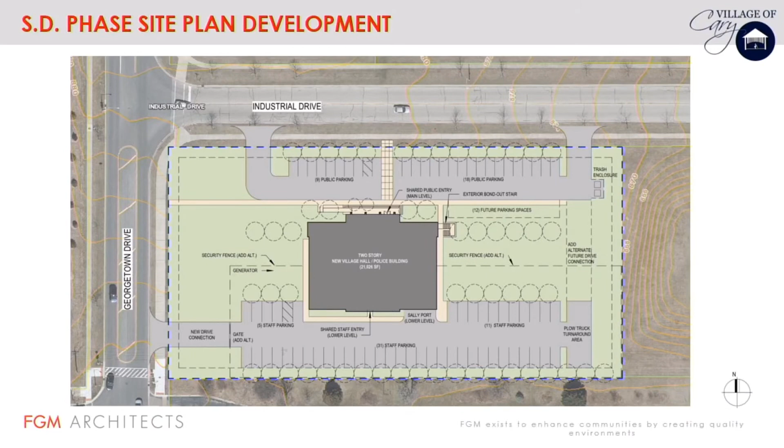And then the schematic design. Question before you go to the next one. Yes. This layout that you have right here, where there's only one way in and one way out for the police department area, is that how it's going to stay, or is that something that we can discuss as far as on the eastern portion, if there's a way out where they can actually go on Industrial Drive as well? We are still working, that's a good question, because we are still working at a staff level of just where the ingress and egress will be. So this is still fluid.

Right, thank you. And then the schematic level floor plans. This is the upper level, main level with the public entry off the north. Both floors stack very efficiently and economically right now, so they're both just under 11,000 square feet. In the bottom left, if you were at the open house as well, you saw we're starting to explore some of the different seating layouts for the council chambers.

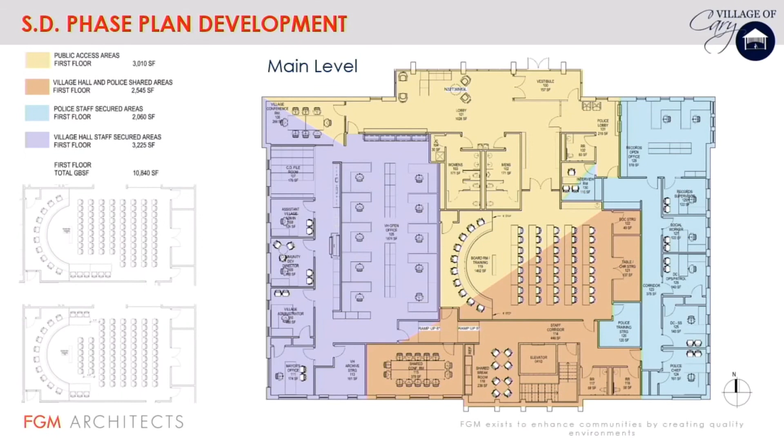The lower level, again, is embedded into the hillside, so the staff entry is on the south. Again, the color coding is primarily police. The orange is the shared spaces, and then the yellow is the limited public access at the northeast corner. And then just briefly, we started about 3 weeks ago with the exterior design process.

So we met with the key stakeholders a little over 2 weeks ago, and like we do with all design projects, we had a visioning session where we looked at regional municipal building examples around the area and took a poll to get great feedback on what materials and styles different stakeholders liked. Then we also looked closer right here in Cary, at your current building, other buildings, icons and signage.

And materials around town, primarily the new train station. There was a lot of great feedback over the last 2 weeks on the forms, the materials, the brick, and the ashlar pattern stone on the base. All of that good feedback led then into our massing studies.

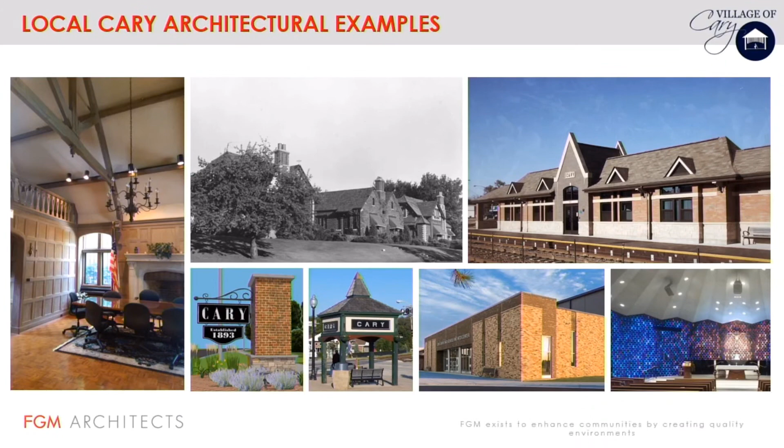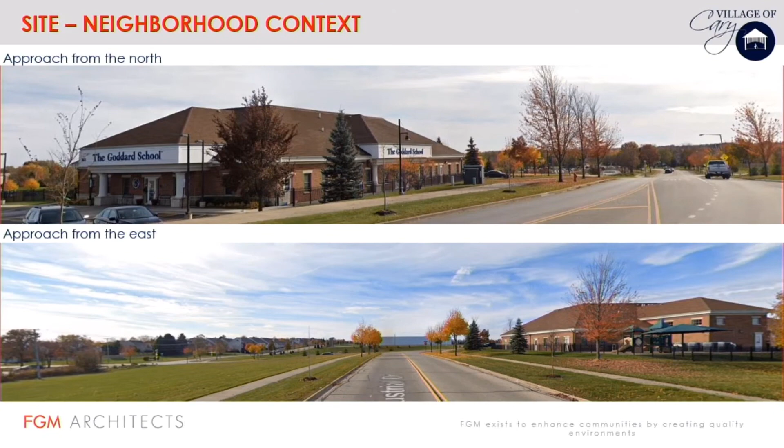2 weeks ago, we also presented some of these context photos, looking at the site, the hill, and the context of the Goddard School just to the north. It's important to understand the approach from all sides for the civic building. As you all know, with the park to the south, it is a building seen from all 4 sides, so it's very important to make sure it looks good from all of them.

How is the mechanical enclosure screened so it's not visible from the public? How does the council chambers get natural light from above? All of these are really going to be exciting to explore further.

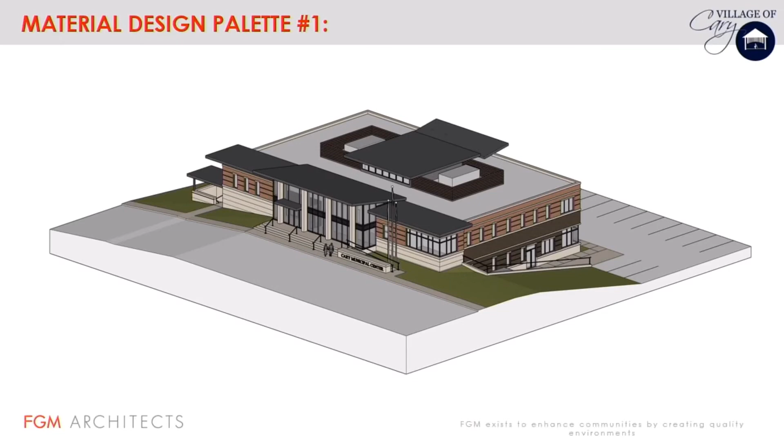But you can see from this bird's eye view, it's a very economical building with a parapet construction membrane roof, with very little areas that pop up. The council chambers, and then the front of the building, is where we're really putting the nice civic presence with the pop-up of the entry.

So the open house last week, we had 3 different material palettes. The first series of slides are the exact slides you saw at the open house, with the exact brick colors, the stone, all of those materials. And then with all the great feedback since last Thursday, we basically created kind of a hybrid variation.

We have 3 variations, and they all kind of stem from palette number 2, which was the perceived favorite. But before we get to the variations, I just wanted to go back through the original palettes from last Thursday. So palette 1 - again, the forms are all the same, it's really just the material differences.

Palette 1 had the red brick blend that's very similar to the train station on the front, and then it had more of a formal limestone-looking base water table. Again, the exact materials are yet to be determined in design development, but it had a bit more of that traditional, formal language, whether it was a cast-looking limestone.

In the back was introduced a little bit darker brick on the base, and that darker brick is similar to what was in the train station. And then the elevations, the four elevations for palette 1.

Palette 2 then had the same brick blend on top, the red brick, but the base was more of an ashlar stone, a bit more of that natural rustic stone similar to the train station. And a lot of these details, as you all know, are interchangeable.

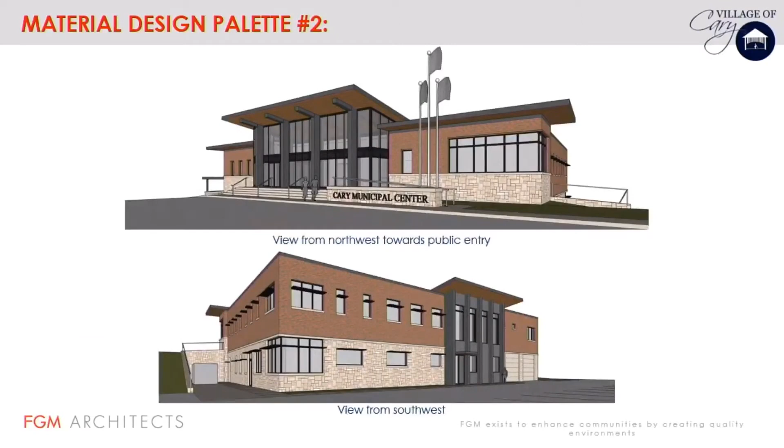And does everyone know when Brian's talking about the piers, the vertical elements? Just want to make sure we're all on the same page.

Yes, sorry, I can point to some of these - so the vertical piers, and the piers in the back. And then, you can barely see it at this angle, but in between the 4 bays, there's all sorts of options with whether it's metal panel, brick, or stone for those.

Finally, palette 3, which was presented at the open house. Same forms, but for this one we chose a different approach, almost an all brick scenario. Even though it was a darker brown brick like the train station, it was brick on top, and then brick with horizontal details and reveals on the bottom. Instead of the shed roof, we explored, just to have a third idea, these wood-looking portals.

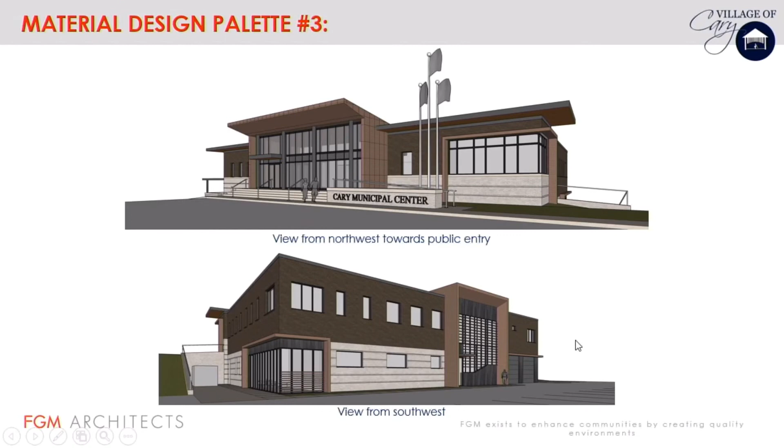So the staff entry, the public entry, and even some corners like this, the police break room and the shared village conference room, had these little portal shade elements.

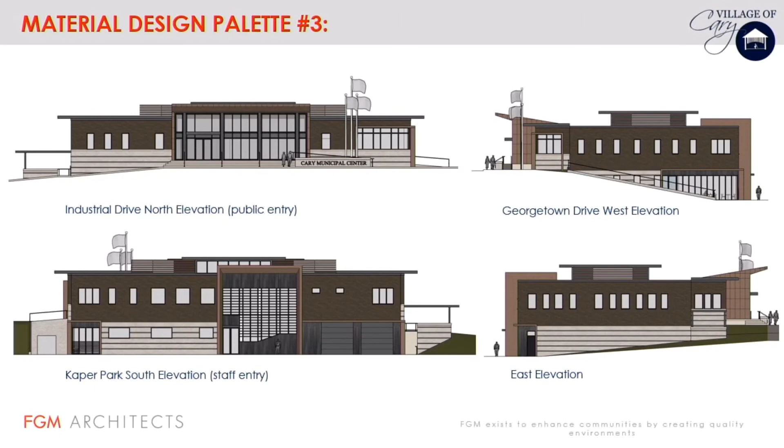So those were the three options presented, and again there was a lot of great feedback, primarily for option 2. Option 1 also had good feedback, and there were a lot of requests to mix and match some different ideas. So the final slides you're going to see try to take a lot of that good feedback, and this is what we really want your feedback on for the revisions.

So where we had palette 1, 2, and 3, the three variations we have tonight are basically 2A and 2B, which stem from palette 2, and then 1A, which is very similar but stems from palette 1. For 2A, the front of the building looks very much the same.

The only things we've done per some of the requests is we added a shading canopy over the sallyport. There was some feedback to have at least a 3-foot extension so that if it's raining or bad weather, as vehicles come in and out they have some protection there. So we added that on all the options you'll see today.

There was also feedback, and in design development we'll be doing more study about the solar heat gain that comes through depending on the time of day on the west and south sides. So on all the schemes you're seeing today, the south and west elevations all have a series of sunshades integrated with the window systems.

The other thing we showed in 2A, which wasn't in option 2 before, relates to comments at the open house and staff feedback that the previous option 2 maybe was a little too plain. What I mean is, even though we had a strong band at the 12-foot datum, from there up where it was red brick, except for the punched openings, there wasn't a lot of extra banding or horizontal detail.

So what you're seeing in 2A and 2B is just some subtle attention to having reveals in the brick. The brick may be recessed or projected, creating a nice shadow line and a little more interest without any added cost. In option 1 before, we had a lot more limestone banding, which some people thought looked too busy, with too many lines. You've probably all seen commercial or residential projects that add interest just by pulling the brick in and out.

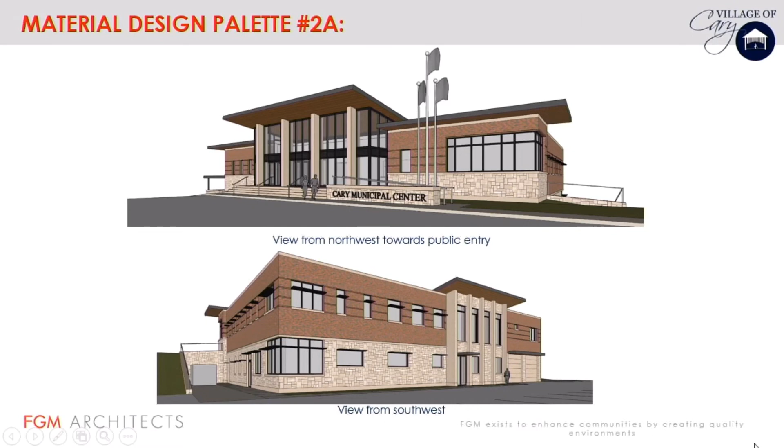Remember, the original option 2 had a much more metallic look, with metal piers in the back and metal infill panels. So for folks who like this rustic ashlar pattern, this scheme really takes that stone and brings the 12-foot datum all the way up in the back.

Now for 2B, really the only difference is that the front looks almost exactly the same, but in the back, instead of having that stone right at the 12-foot datum, it comes down to the 4-foot datum. So you get more brick, more red brick, and a little less stone. The stone, if it's a real bed-depth ashlar stone, is probably a bit more expensive than the red brick, so you can judge based on cost, or just on aesthetics, if you like seeing more brick and less stone.

So that's really primarily the difference between 2A and 2B: just the proportion of red brick versus stone.

Everything else is pretty much the same. And then we have one last variation, and that's 1A. Again, very, very similar. We're really just getting down to the details here.

The only difference with this one is the stone-looking base. Instead of being in an ashlar pattern, which is a bit more prairie style or rustic where you see a lot more of the separated stones, this one is more of a formal limestone-looking rhythm for both the front and the back. And in the back, it's down at that same 4-foot datum that you saw in the previous option.

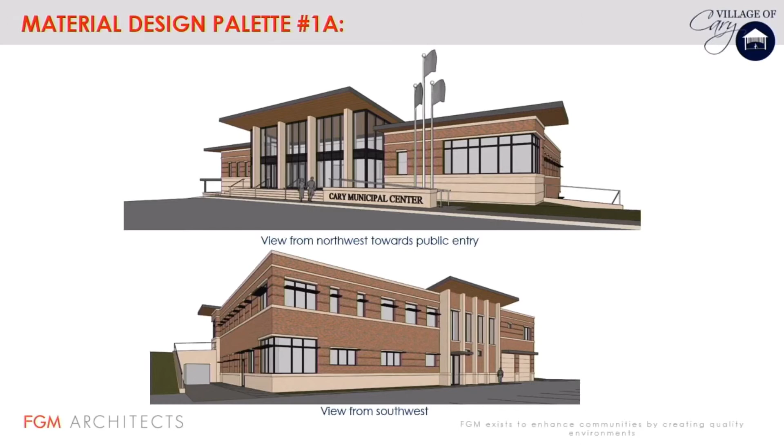But again, the red brick band is the same. Again, there are things you can mix and match. What we thought we'd explore in this one is, instead of having stone go all the way up in the staff entry pier bay, we're showing more of the red brick infill. So you still have the vertical piers separating the staff entry and all the window bays of the stair and break room, but in between, it's more red brick as opposed to the previous scheme, which was more stone. So that's really what we brought today.

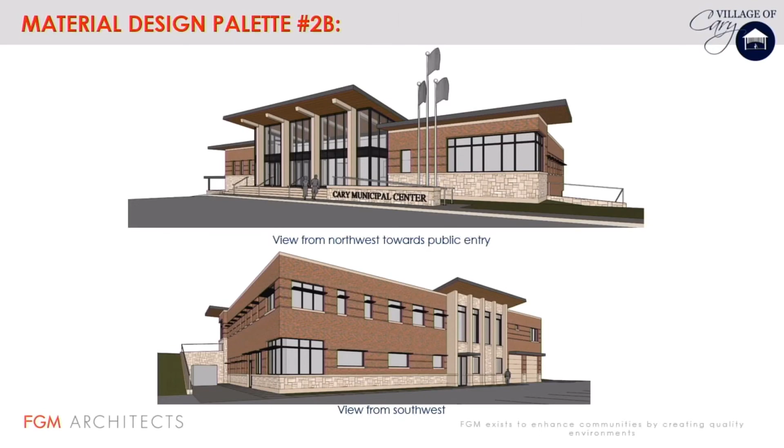So after the great feedback of the open house, we have 3 revised options: 2A, 2B, and 1A. We would love to open it up for any comments or questions, or likes or dislikes.

Any comments? Any favorites? I like the lighter pillars—is that what you call them? Yep, the piers. Okay, pillars, yep. And I also like the stone higher up. So you like 2A? Is that what it is? Yeah, yep, 2A is the higher stones. Okay, we thank you.

I like the stone too, and that's something we'll have to work on with Frederick Quinn, our construction manager, because there's probably an increased cost with that. So that will be part of trying to tighten the belt. I want to do as much stone as we can, but we're going to have to work behind the scenes and see if it's affordable.

Do we have any idea what that cost difference is? We're in the ballpark of being able to afford it, but there's still additional work we're going to need to do.

Is there a difference in that stone and the more limestone option in maintenance cost over the long run? I don't think maintenance cost, I think it's the material cost we're exploring the differences in. But once it's installed, when you think about the life of a 40 or 50-year building and tuck pointing of masonry, the smaller the unit, there might be more tuck pointing in the future, whereas the bigger, more formal limestone blocks have fewer mortar joints. So maybe long-term it would be a little less maintenance with the bigger pieces.